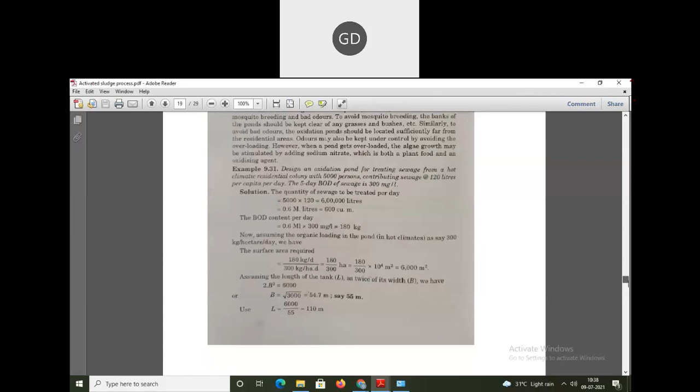Last class we discussed the aerobic stabilization units. First one was oxidation ponds and stabilization ponds, which we have discussed. Next is oxidation ditches, also known as extended aeration lagoons.

It is a type of conventional activated sludge plant, which we have already studied. It has been modified to eliminate the primary sedimentation tank and also the digestion tank of the activated sludge process.

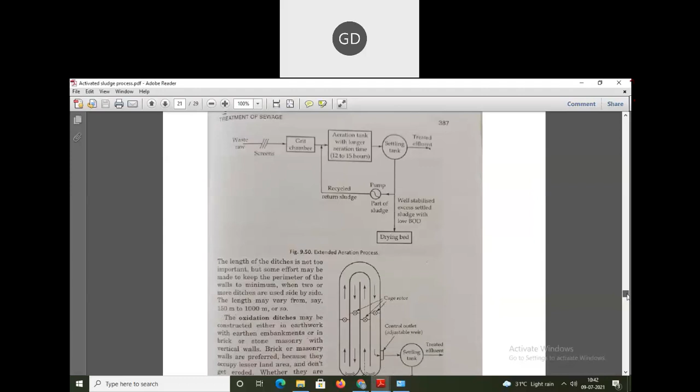The width of the ditches is limited based on the type and availability of aeration rotors used, and it can vary from 1 to 5 meters. The length of the oxidation ditch is not that important, but you keep the perimeter of the walls to some minimum value when more than one or two ditches are used side by side. The length can vary from 150 to 1,000 meters.

These oxidation ditches may be constructed either in earthwork with earthen embankments, or in brick or stone masonry with vertical walls. Brick masonry can also be preferred because it occupies very less land area and doesn't get eroded. So the ditches can be of earthwork material, or brick or masonry walls can be given.

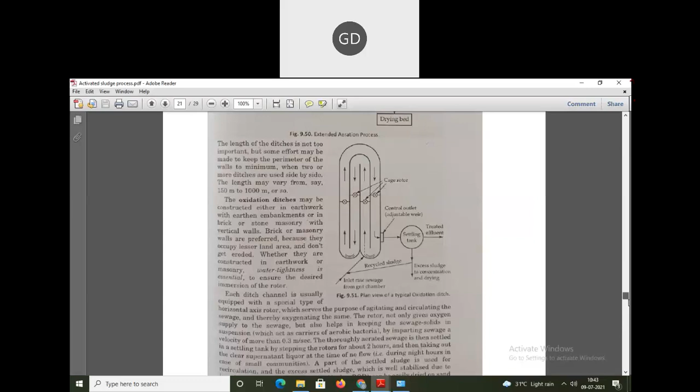The result from this oxidation ditch is that the quality of effluent you get is very good. The removal of suspended solids is about 95%, and the BOD removed is also very good, about 98% of the BOD is removed.

The power consumed in this process is more than what is required in an ordinary activated sludge process. So more power is consumed here than in an ordinary activated sludge plant, and the cost is also extra.

This method is advantageous for treating wastewater where the quantity is very less, and at places where sufficient land is not available. For constructing large size oxidation ponds, obviously a very large land area is required, but if the land area is not sufficient, you can construct this kind of oxidation ditches instead.

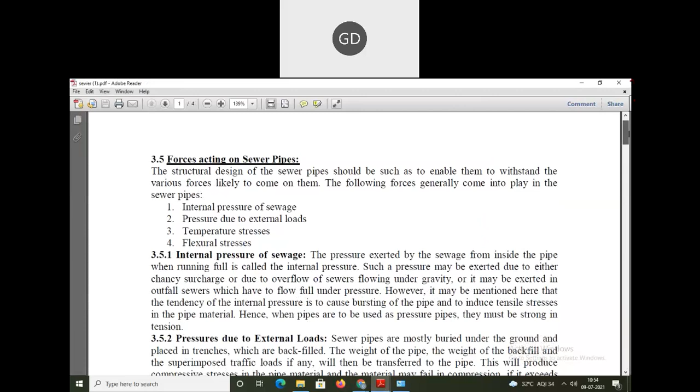One part is left, which I should have covered before, but I left it out at that time. That part is about your sewers.

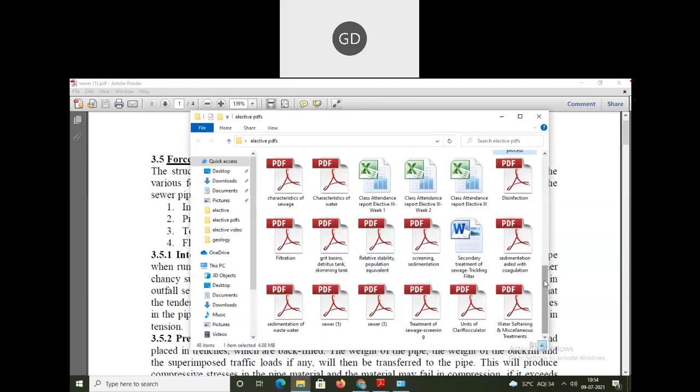You already know what a sewer is, so it will be easy for you to understand now. Basically, these sewers, or sewer pipes, are generally circular pipes that are laid below the ground level.

They are generally sloping continuously towards the outfall point, and they are designed to flow under gravity, except for the outfall sewer, which carries the treated and pumped sewage. Also, this sewage can be pumped into the discharging sources, and hence it will flow under pressure.

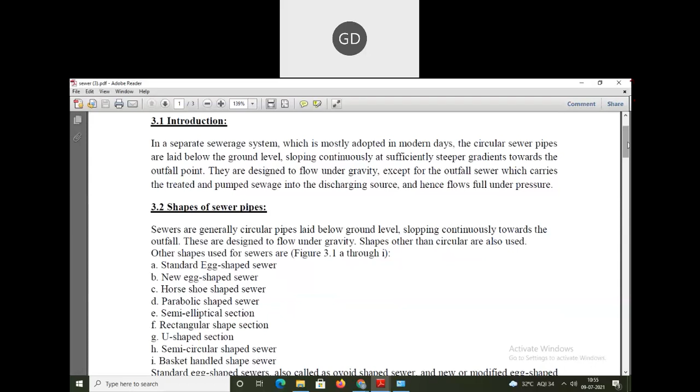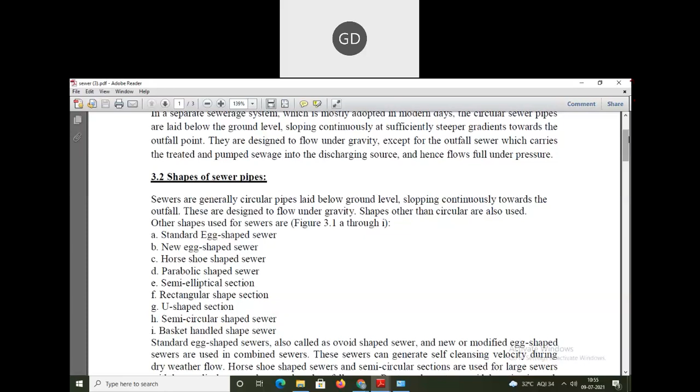There are different kinds of shapes of sewers. The sewer pipes are normally circular in section, but there can be different sections such as: standard egg-shaped sewer, new egg-shaped sewer, horseshoe, parabolic, semi-elliptical, rectangular shape, U-shaped, semicircular shaped, and basket handle shaped. These are the different shapes of sewer available.

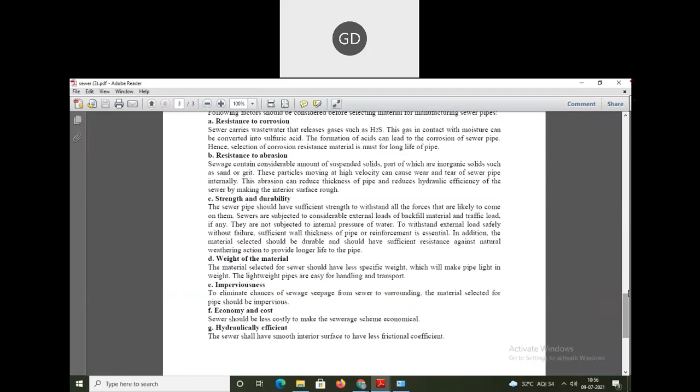These are the shapes of the sewers. Next are the important factors that you have to consider while selecting the kind or the material of a sewer. There are some factors which you have to consider while selecting the material of a sewer.

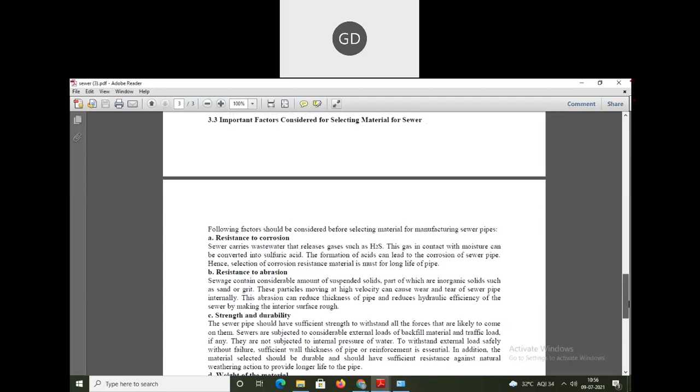It should be resistant to corrosion. Sewers contain H2S gas, and this gas, when it comes in contact with moisture, converts to sulfuric acid. This sulfuric acid leads to the corrosion of the sewer pipes. So when you select a sewer pipe, it should be corrosion free, so that the pipe has a very long life and can be sustained.

Next is resistance to abrasion. Sewage contains suspended solids, part of which is inorganic and part organic. The inorganic part contains sands or grits, and when these particles move at very high velocity, they can cause wear and tear of the sewer pipes internally, known as abrasion.

So this abrasion can reduce the thickness of the pipe, and also it can reduce the hydraulic efficiency of the sewer. If it makes the interior surface rough, it can reduce the thickness of the pipe and also reduce the hydraulic efficiency of the pipe.

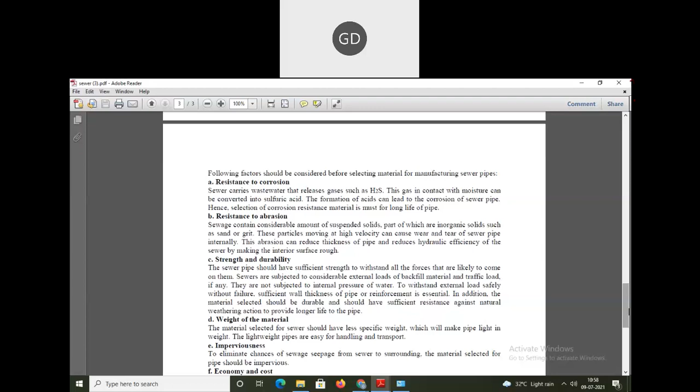Next is the weight of the material. The sewer material should have a less specific weight, and due to its less specific weight it will make the pipe light, so it will be easy for handling and transportation. Then the sewer material should be impervious, so that there will be no seepage through the surrounding of these sewer pipes.

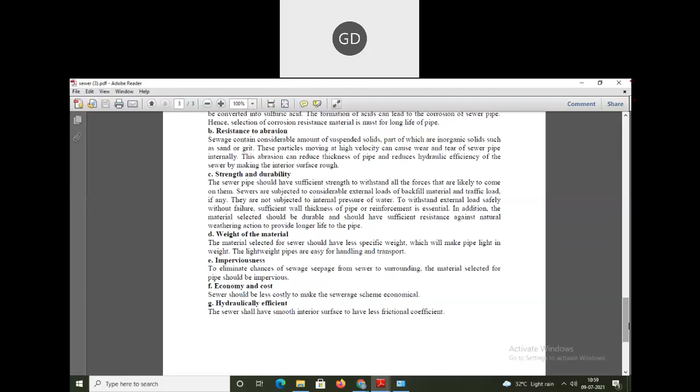Then economy and cost also: the sewer should obviously be less costly and economical. And the sewer should have a smooth interior surface, so that it doesn't have much frictional coefficient. Okay, so this is all about your sewer pipes.

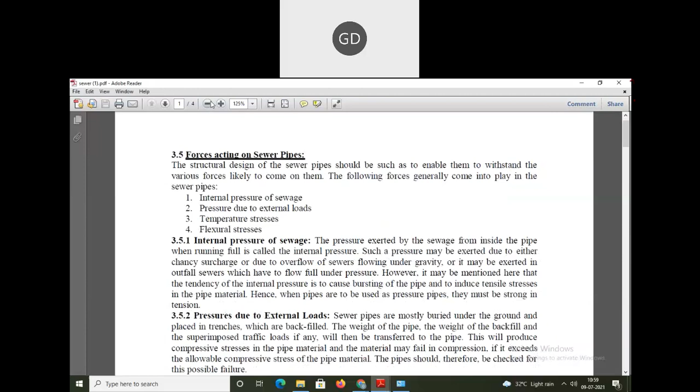So this is all about your... okay, just let me see if one more thing is there or not. Okay, one more thing is there.

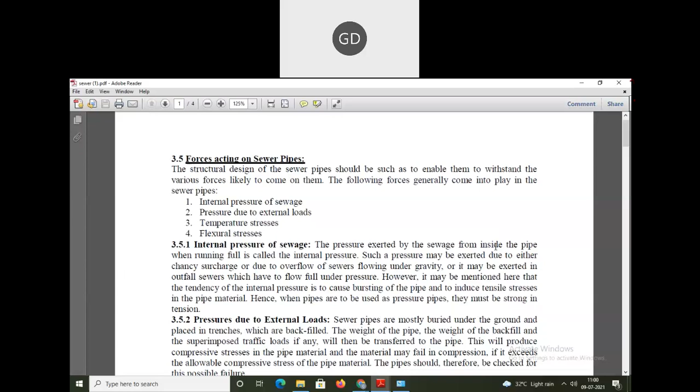So, what are the factors that are acting on these sewer pipes? Some forces come in contact with the sewer pipes. It is subjected to the internal pressure, it is subjected to external loads also, then temperature stress is also playing an active role, and flexural stresses are also there. So these are the forces acting on the sewer pipes.

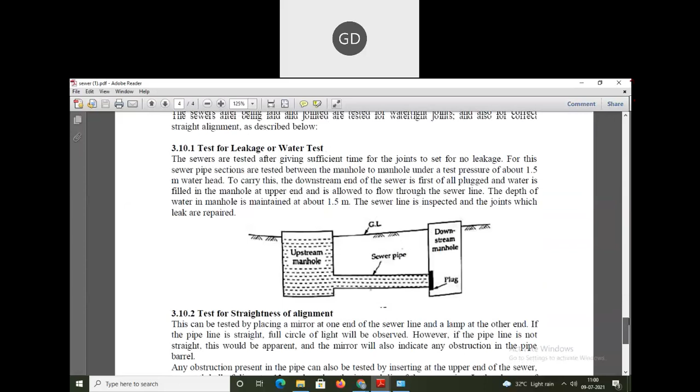Next, how will you test whether the sewer pipe has some leakage or not? There is a test for leakage, the water test. Sewer pipe sections are tested from manhole to manhole. A pressure of about 1.5 meter water head is taken. The downstream end of the sewer is first plugged, and water is filled in the manhole at the upper end and allowed to flow through the sewer line. The depth of water in this manhole is maintained at about 1.5 meter, the sewer line is inspected, and the leaks at the joints are repaired.

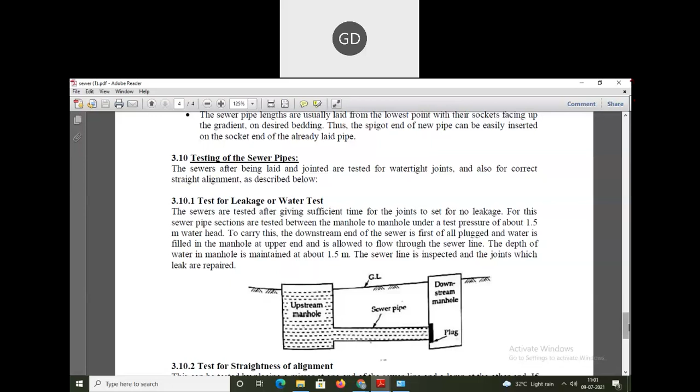The next test is a test for straightness of alignment. You place a mirror at one end of the sewer line and keep a lamp at the other end of the sewer pipe. If the pipeline is straight, the full circle of light will be seen at the other end. However, if the pipeline is not straight, you cannot see a full circle of light. It would be apparent, and the mirror will also indicate any obstruction in the pipe barrel. So this is the test for alignment of your sewer pipe.

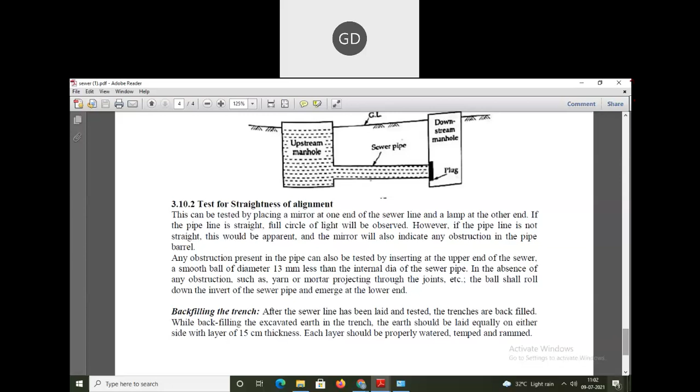Okay, so this is all about these sewers. It was a very short topic.

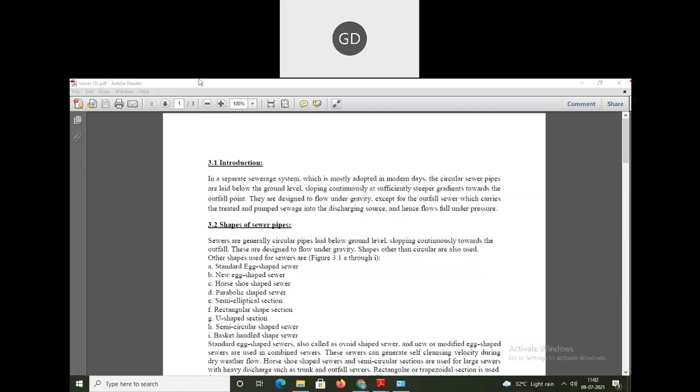So this was the end of your physicochemical processes for water and wastewater treatment subject. I hope it was not that tough, because you have already studied this subject in your 5th semester. So I hope your exam will be good.